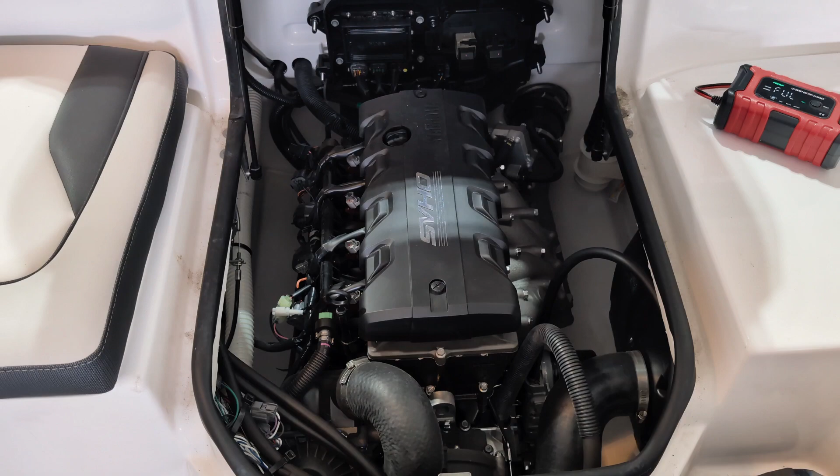All right, there she is. So today we're going to be greasing that intermediate bearing housing for the second time.

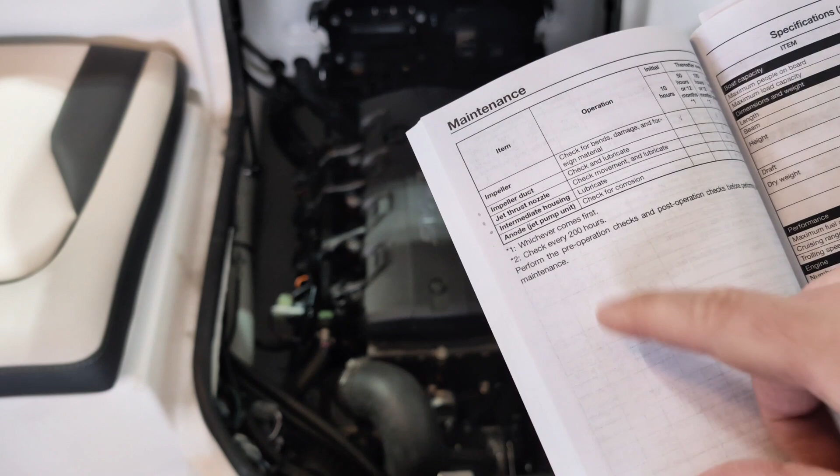Got this bookmarked here. This is our 2021 Yamaha AR195 intermediate housing, every 100 hours or 12 months, whichever comes first. So I'm a little guilty on this. I remembered the 100 hours part, but I didn't remember to do this every year. It would be a good idea to just do this whenever you do your oil changes, whether you do that yourself or at the dealer.

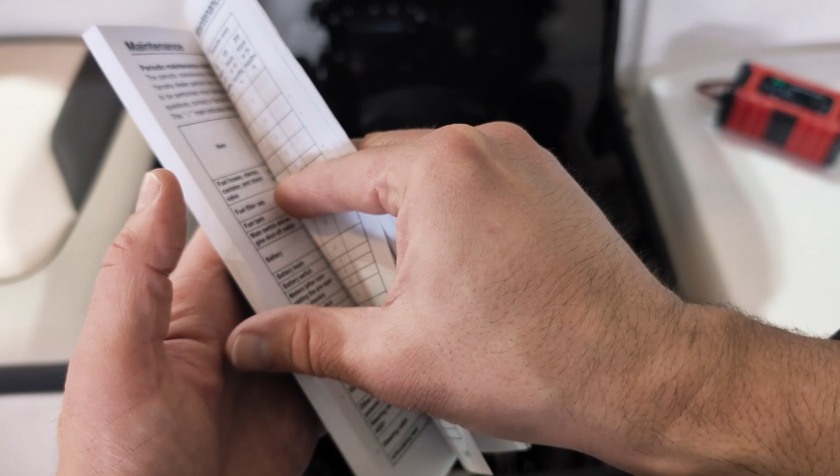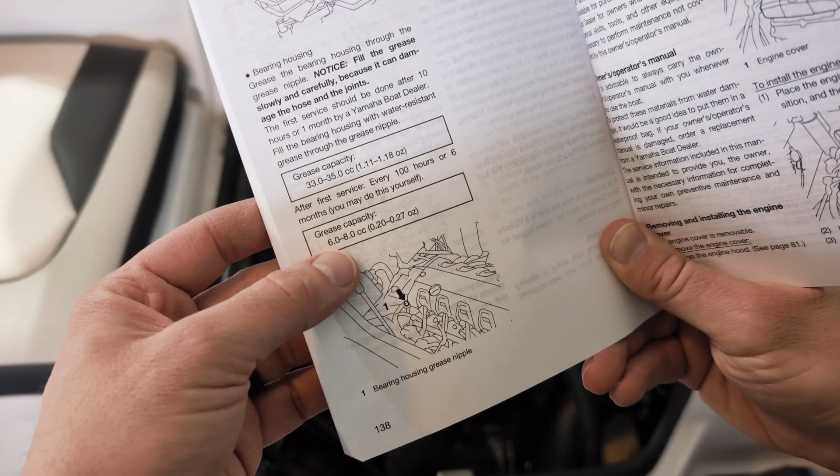And the funny thing here, I pointed out last time, but anyways, this says every 100 hours or 6 months to do the refill. So the grease capacity is 6 to 8 cc's, 0.2 to 0.27 ounces.

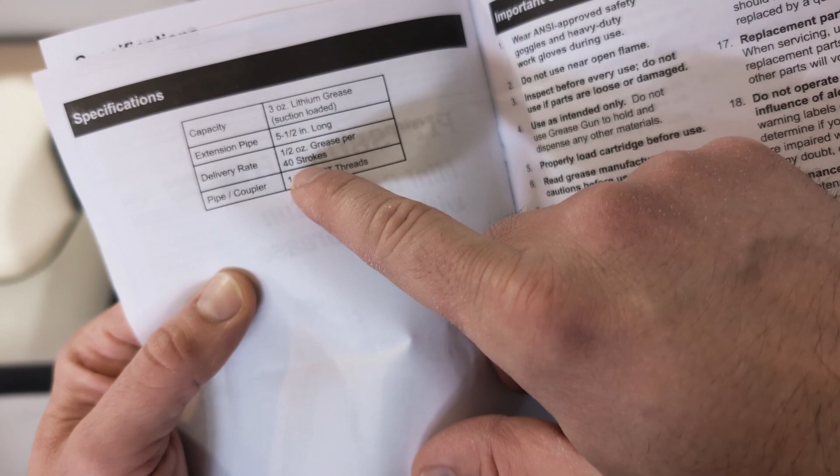Now, if we were to look through the documentation here in the grease gun, it says that 40 strokes is half an ounce right there for my little pistol grease gun.

So what we're going to do, if we need 40 strokes for half an ounce, we're going to aim for right in the middle of that, so 0.25 ounces. Half of 40 strokes is 20. So we're going to aim to do 20, but we're also going to fill that hose back there.

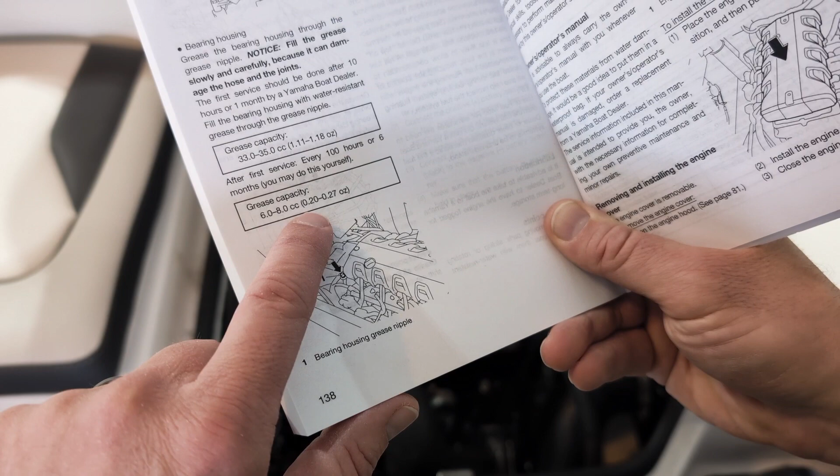Make sure it's not, right now it is loose. I checked it, and we're going to wait for that to tighten up, just like we did for the first time we did it. Something that I wanted to point out is kind of a joke.

I don't know, maybe there's a law that they can't sell this kind anymore, but this is the original grease that I got, Sta-Lube. I got it from Harbor Freight. You can see that it has leaked out. This is aluminum complex base.

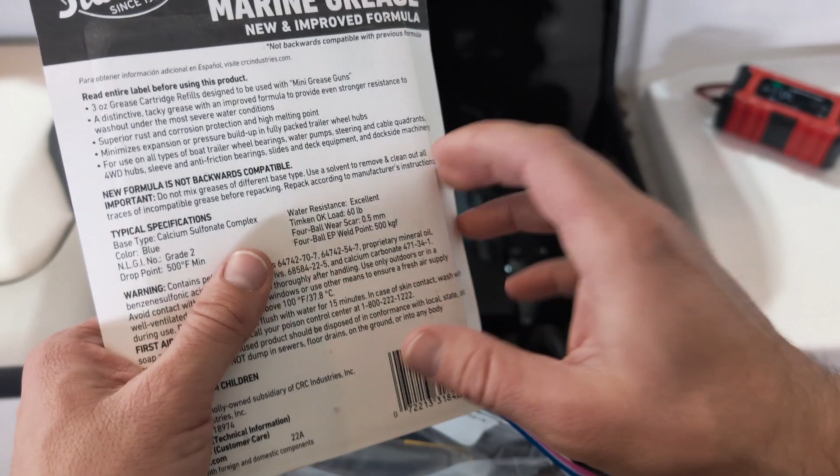And so last summer I went back and got another one. It says new and improved formula. I didn't think much about it. Then you turn around, new formula is not backwards compatible. And I'm just like, what the heck, Sta-Lube? I mean, way to put a boot right in the butt of your loyal customers. You're going to sell them something that's not backwards compatible with what you've already sold them.

So this is a calcium sulfonate complex. I'm not a chemist or whatever it is that deals with that. But I have read online that if you mix different types together, they will get softened and will not protect your moving parts properly.

I also reached out to the dealer where I got this boat and asked them, what are you using, calcium or lithium, or what are you using here? Aluminum, and they didn't know. He didn't realize that there was anything different, so they couldn't tell me. But anyways, I use the same stuff on my wheel bearings, greasing the different cables and pivot points out back.

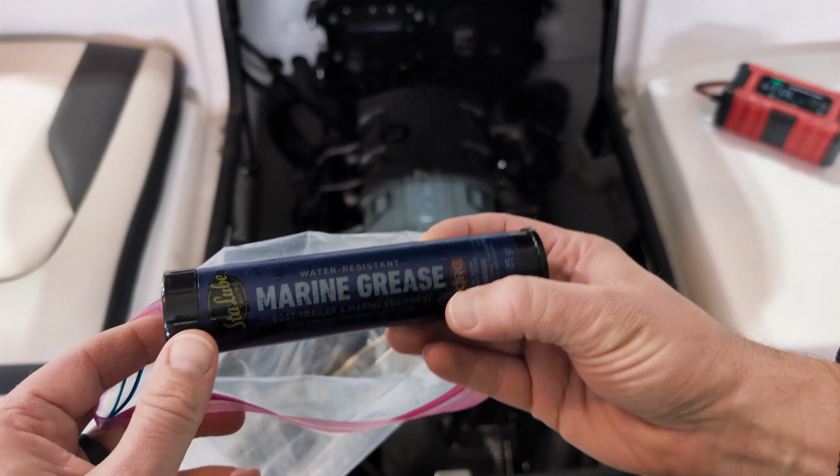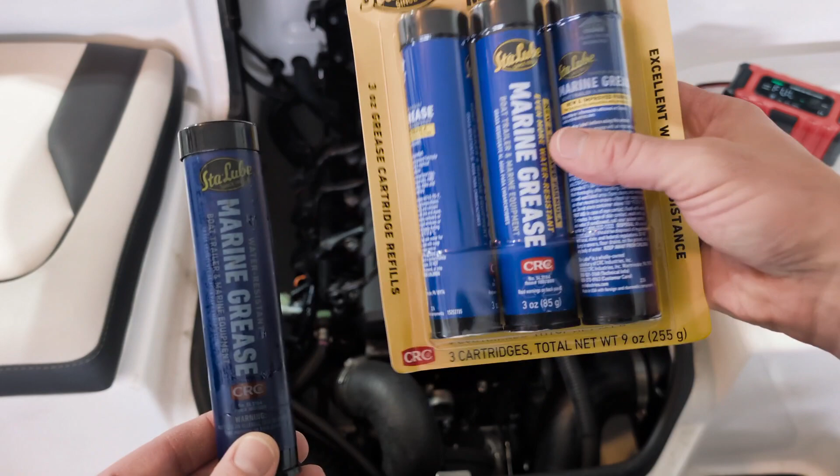So this is what the tube currently looks like. If you haven't seen the first video, I'll put a link down in the description. I'll try to do a little button to click on, but anyways, this is what they looked like new. This is what it looks like now. This is the aluminum base, like what I already have in there.

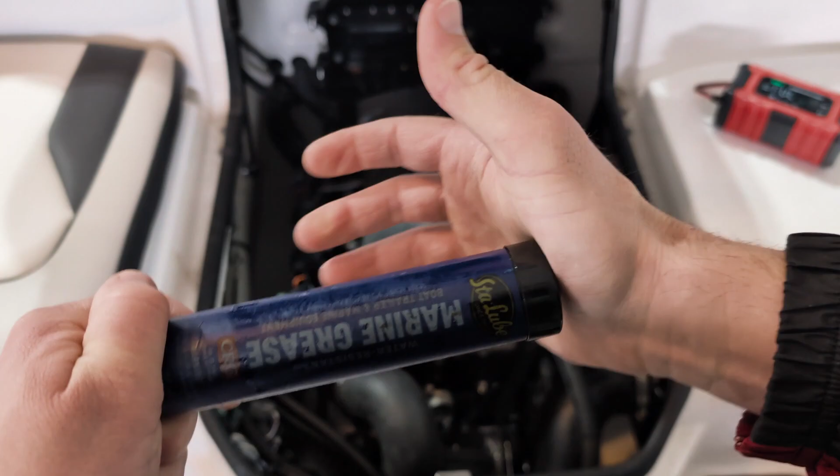It's blue. I need to cut an opening here and put this in the gun. The one I have in the gun right now is empty. I even went back to Harbor Freight because their website says they have an aluminum base one, but really it's the same one that I just bought, and they have not updated their website. So here's my grease gun, the same one that I used last time I did this.

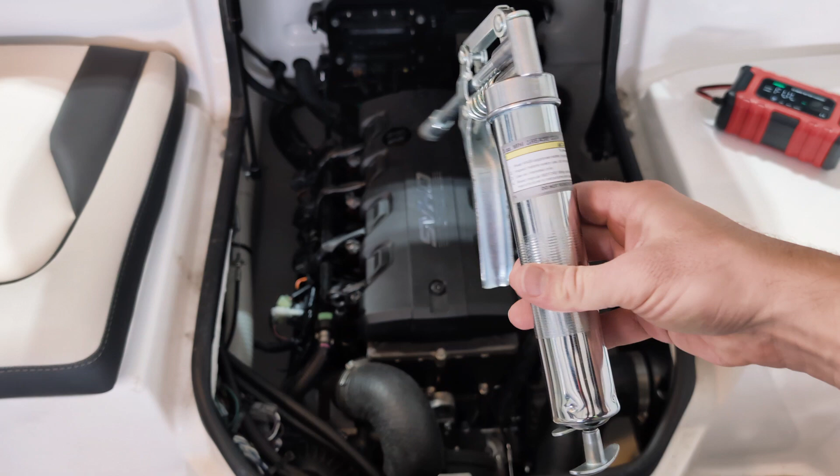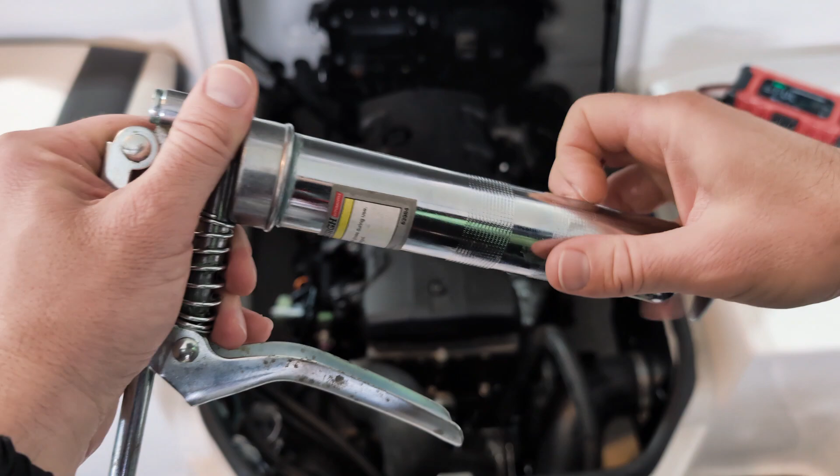It's pretty much empty, just a little bit coming up right there. You can see it's empty, so I'm going to go ahead and get this old tube out.

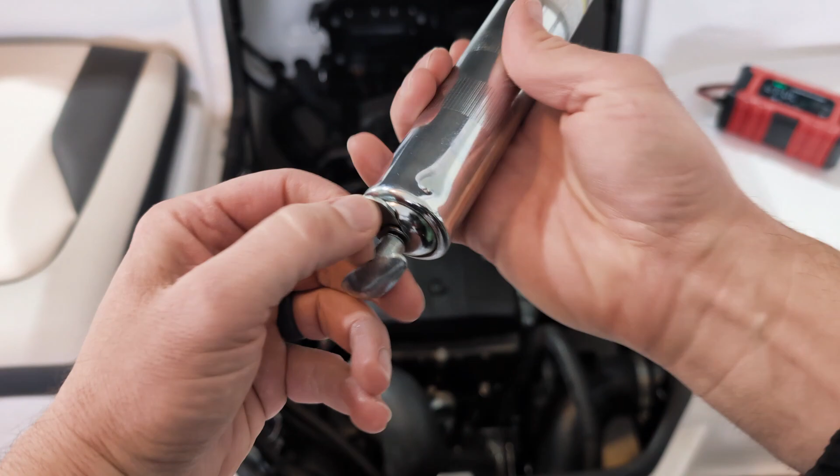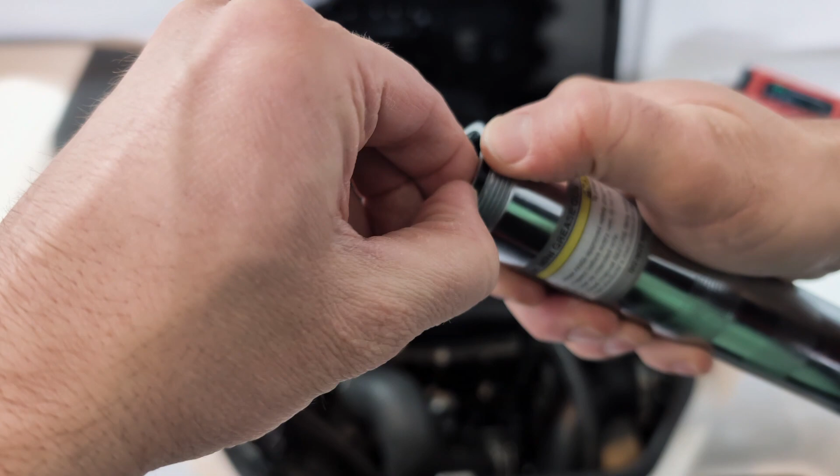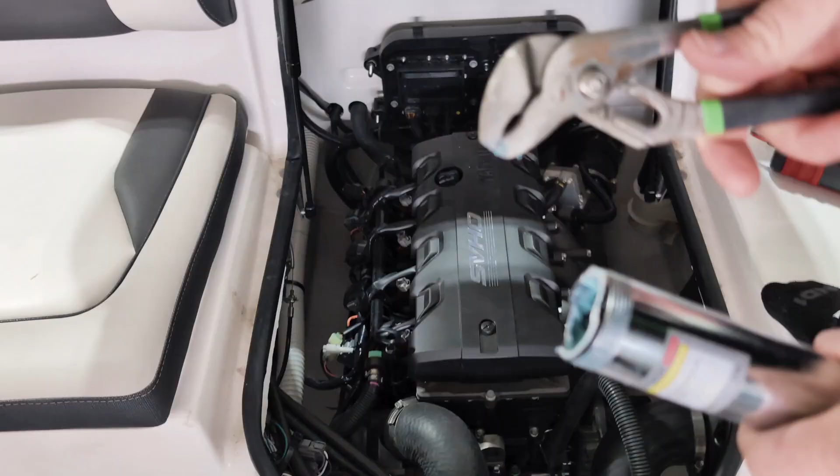This is really stuck. Maybe I should have put some grease on the outside of this.

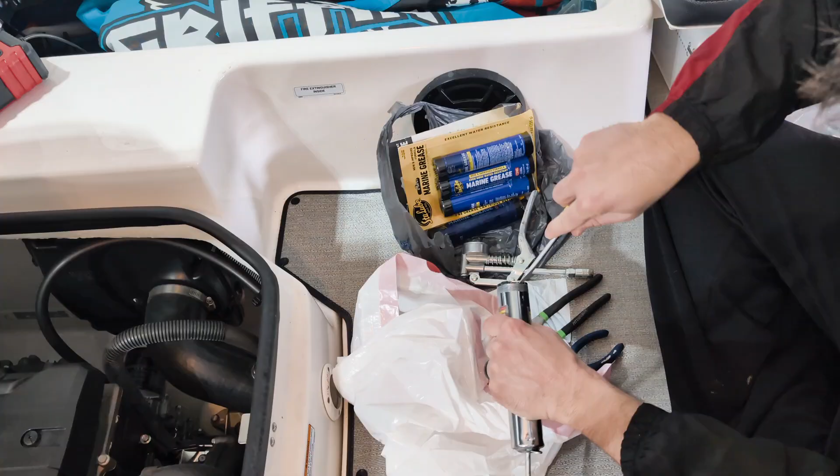Trying to create some separation between the old tube and the grease gun. I'm breaking parts off trying to get this out.

This must be the first time I've had to change this. I didn't think so though, because it came with 3 tubes of grease. I'm just being careful not to damage those threads. Yeah, because this...

That doesn't seem to be holding it down. Oh, I hear it kind of peeling away from the cylinder. Yeah, maybe, I don't know.

This has been through just regular amounts of heat from boating, and it's been sitting in the garage some. But it does sound like it may have gripped onto that metal tube somehow.

If this doesn't work soon, I'm going to have to get a longer screwdriver so I can get all the way to the bottom.

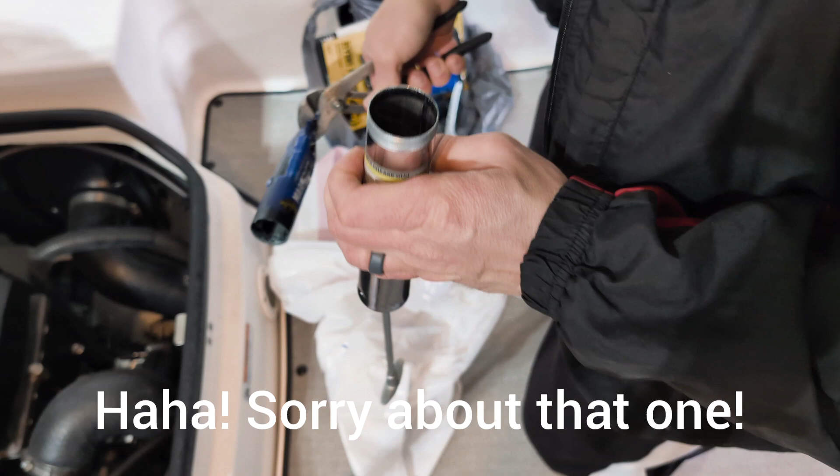Wow, wow, wow, all right, got it off. Yay! It doesn't seem like I made a big mess either.

So, okay, we've got - I'm going to take the cap off of the new one and open this up.

This seems ridiculous, probably way too much. I don't want this thing stuck, so I'm just going to make it all easier.

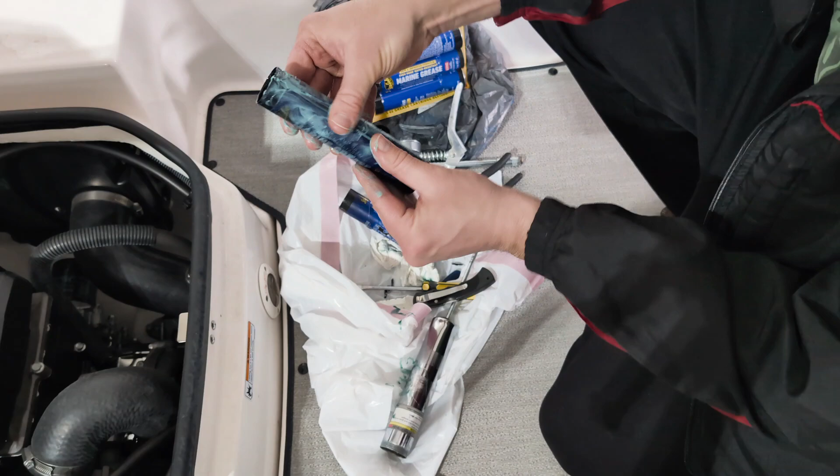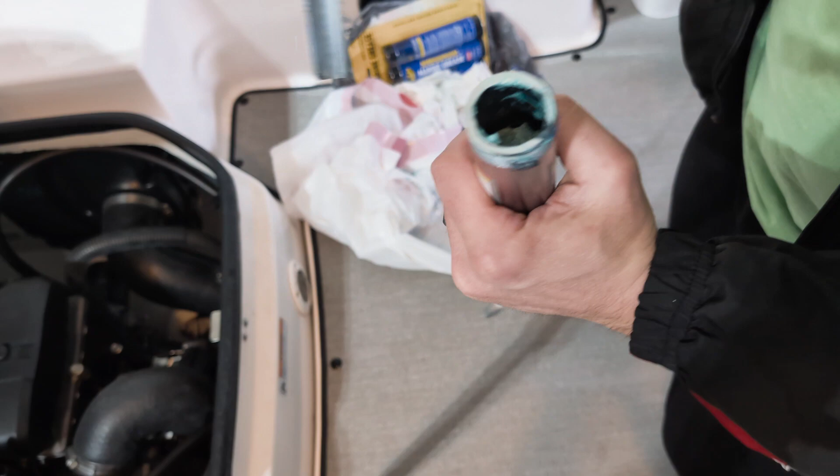It's like the paper was causing it to not go in, that was one of the issues. Now I'm going to go ahead and put the top back on.

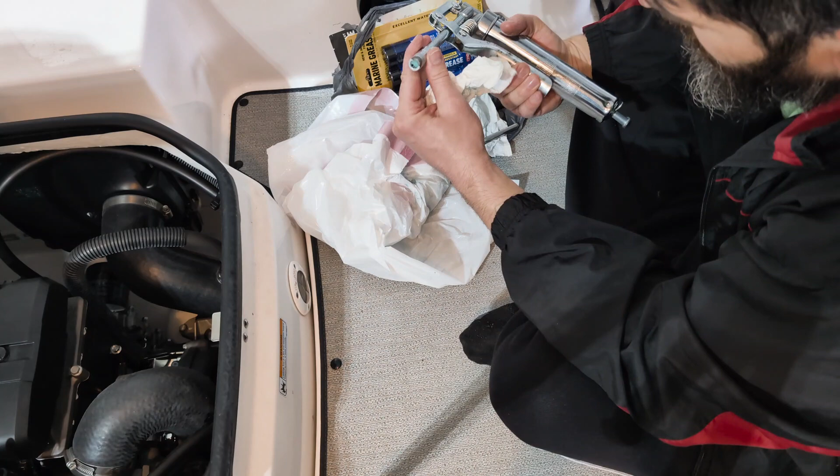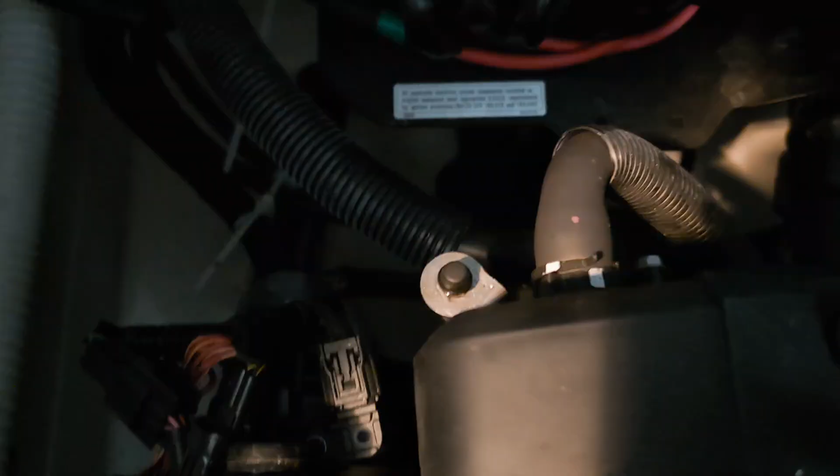Now we're in business. This is where we're going to fill right here. This has a little cap that pops off, and that's where we fill. I'm just going to put that out of the way. There's a tube down here at the bottom.

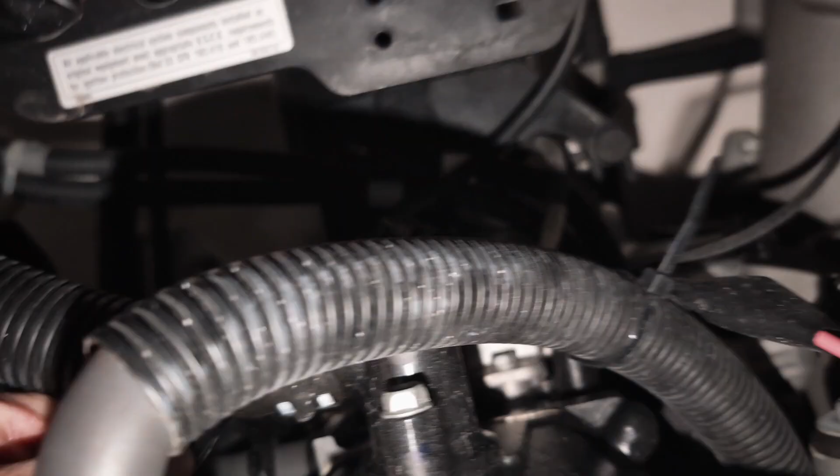If you watched my previous video, you know that this will tighten up. Right now it seems extra floppy and bendy. So we're going to go ahead and do those 20 pumps, and we'll be filling this, and as soon as it tightens, we'll stop.

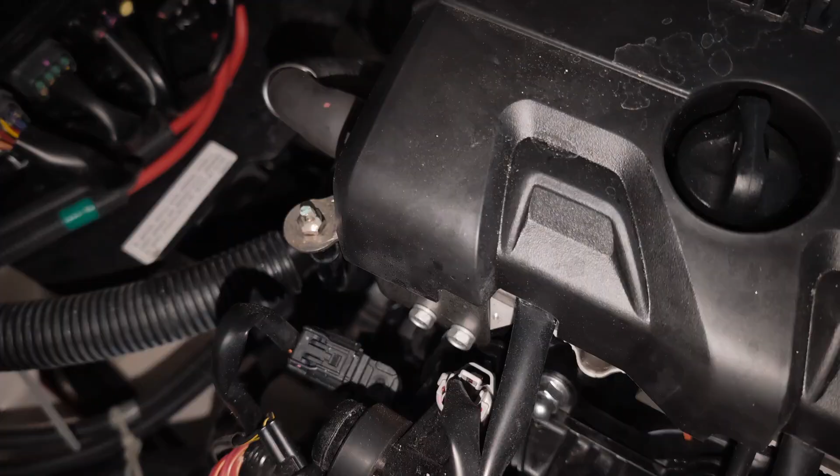I'm going to go ahead and pop that on. Okay, it's on, I can start pumping. 3, 4, 5, 6, 7, 8, 9, 10.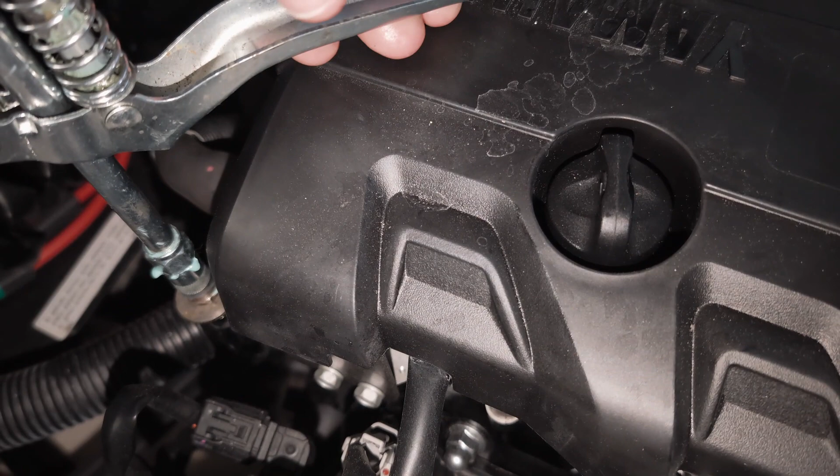Okay, I'm going to go ahead and switch over here and look at this hose, because you don't want to overfill it. Still pretty floppy.

11, 12, 13, 14, 15. 16, 17, 18, 19, 20.

Okay, now it seems like there's definitely some in there. Not quite as floppy as it was.